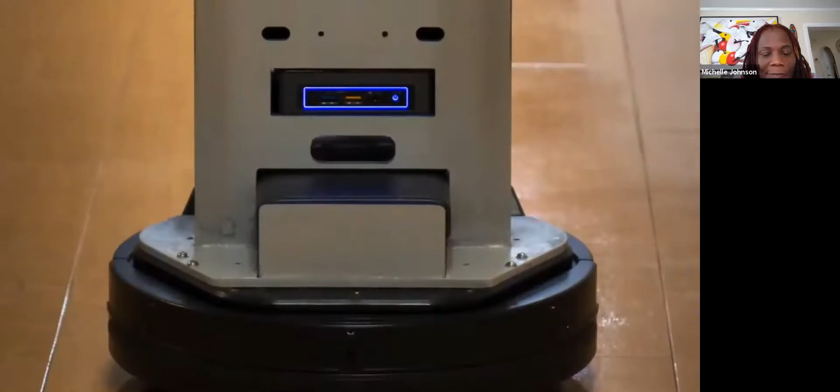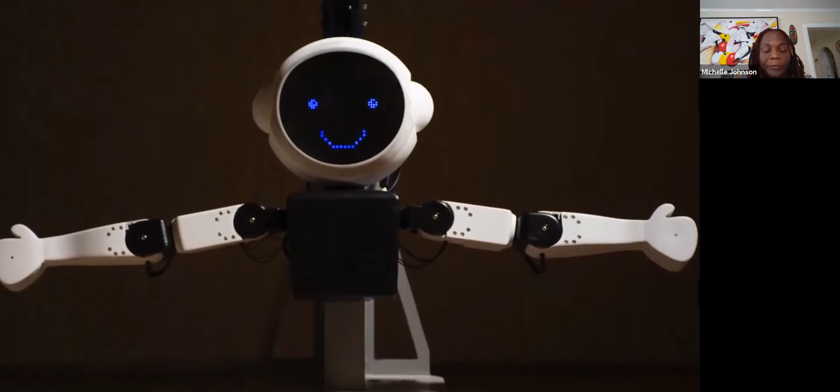Hi there. I am Lil'Flo, a remotely controlled robot for telerehabilitation, and this is my operator. I was designed to help with upper extremity motor assessment and rehabilitation over telepresence, and can play games with patients. The hope is that by playing with me, patients will be more compliant and engaged. The user interface to control me is very simple. My operator can type in words for me to speak, change my faces, put my arms in different poses, drive me around, and have me play games like Simon Says. My operator can see the patient through my 3 cameras. I have many different faces, and my arms can be put in any pose. My operator can remotely drive me in different directions. I can play motor assessment games like Simon Says with the patient. Simon Says clap your hands. Simon Says put your right hand straight out front. That was fun, let's play again next time.

Okay, cool. So that kind of gives an overview of what we're going to be talking about today: this system, the design of the system, why we've built it, etc. And the why is the beginning, and it starts with the people who are interested in being helped by this sort of system. That's people who generally have upper extremity motor disability.

Normally when we're looking at it, we're looking at people who've had some sort of neural trauma. The video you see playing right now is of patients who have cerebral palsy. It's the most common motor disorder in young children, affecting over 500,000 children in the US, about 2 to 3 per every 1,000 live births. It can range from people who have very mild disability and can play soccer, all the way to people who are wheelchair bound and can't move their mouth enough to eat. So there's a variety, and there's no cure for this.

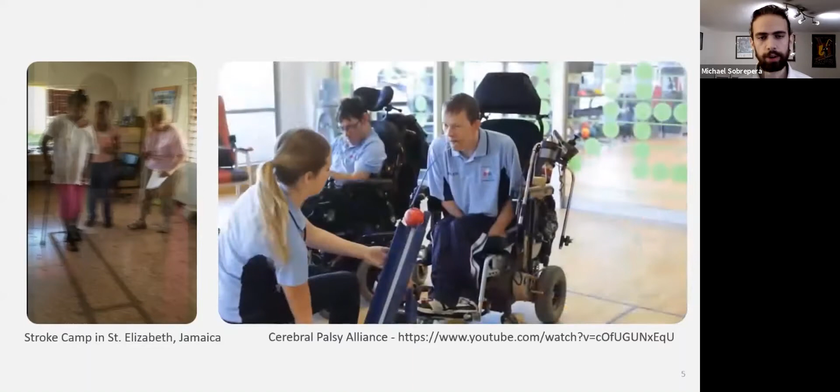The thing is, rehab can have a really profound impact on long-term outcomes, especially when people are young. You can see this little girl has spasticity in her left hand, where her hand is clenching involuntarily. Again, there's no cure for that, but if you can stretch her out while she's young, and if she can do various strengthening activities, then she can end up in a better place.

Now, in this other video, we have some people who have had stroke, and stroke is the result of a neural injury where part of the brain is denied access to oxygen. That can lead to motor and cognitive deficits. Again, there's no cure, but rehab can have a big impact. Rehab is one of these things where people have the potential to live a full life, and without the rehab, they won't. So it's really important that they get that rehab.

The thing is that there are a number of challenges to rehab today. These come from cost. Rehab is really expensive. The people who do the rehab are highly trained, and therefore they have a significant cost.

It also comes from the geographic location of where the people live who need rehab and where the rehab can be provided. A lot of people who have CP and stroke live out in rural areas or in low resource settings, so they can't get into cities like Philadelphia where you have significant availability of medical care.

We're also seeing large shifting demographics. Our population curves are inverting into this inverted pyramid where you have a lot of old people and not as many young people. That means the few young people you have aren't sufficient to take care of the elderly, who are more and more surviving things like stroke, as well as the young people who are more and more surviving things like cerebral palsy at birth. That really leads to supply side challenges where you just don't have enough rehabilitation professionals to take care of the load of demand.

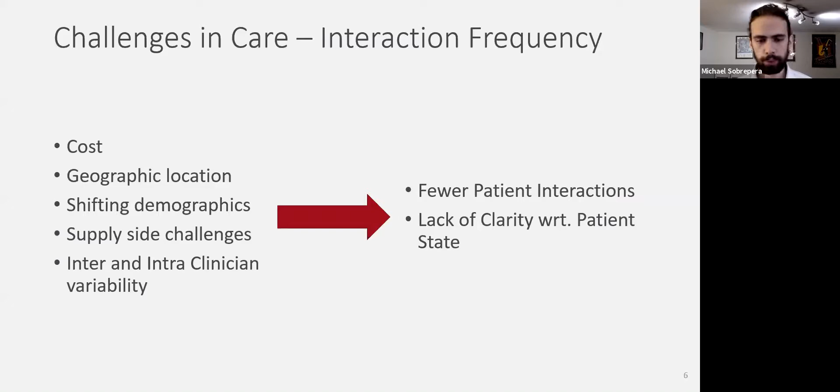So there are a few goals that come out of this. The first is to develop and evaluate a robotic system, which you've now seen. We've developed it, which uses a social robot to enhance telehealth interactions.

Why would we want to do this? The premise is that if you have these distant interactions that can't happen right now naturally, and now with COVID even more so, everybody says well, we can use Skype, FaceTime, some sort of telepresence-based technology. But for something like rehab, we don't think that's necessarily good enough. We think you need a more present type of interaction that's easier to understand, especially when you consider that a lot of these people also have some sort of cognitive deficit. Understanding over a screen can be limited.

This comes up frequently. I discuss this robot with a lot of kids. They come in for these outreach sessions, and I'll always ask them the same question: if your mom was standing right next to you and told you to take out the trash, or if your mom called you on FaceTime and told you to take out the trash, which one are you going to listen to? All the kids know they're going to listen to their mom standing right next to them, but maybe not digitally.

And so it's the same thing here. How do we make these interactions more real? How do we make it so that when I tell you right now to lift your right arm out to the side, and that was all you just saw, we need to improve that. I could stand back, lift my arm out to the side, now you can see it, but now you can't see my face, and there's a lot lost there.

We also want to develop a computer vision-based objective diagnostic tool for upper extremity function to address some of those clarity issues. If you have people working over telepresence, we think you need more than just the video coming back to the clinician, so we'll get into that a little bit.

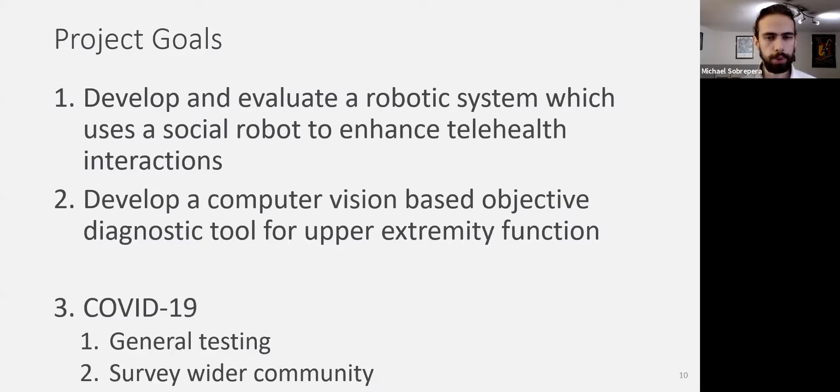More recently, we've had some project goals develop around COVID-19. The robot has been used a few times in the hospital, and there have been some clinicians who've tested it pretty heavily. We'll get into a little bit of what we've been doing with that, and some surveys we're doing in the wider community to understand how robots fit in this new post-COVID telepresence imbued world.

I want to keep diving into why some of this stuff would be a good idea. This is our theory of how these interactions develop. Normally, when you're in person, you have instruction and emotion flowing back and forth. The clinician is able to motivate the patient to do rehab, which is oftentimes not comfortable and not that fun. The clinician being present with the patient allows them to perceive the way the patient's moving so they can deliver some sort of long-term assessments.

But when you just have video, you're going to have instruction passing back and forth. I can tell you what to do over video, and I'll be getting some noisy state data back, but it's not as rich. So we put this humanoid robot onto the telepresence platform that you've already seen.

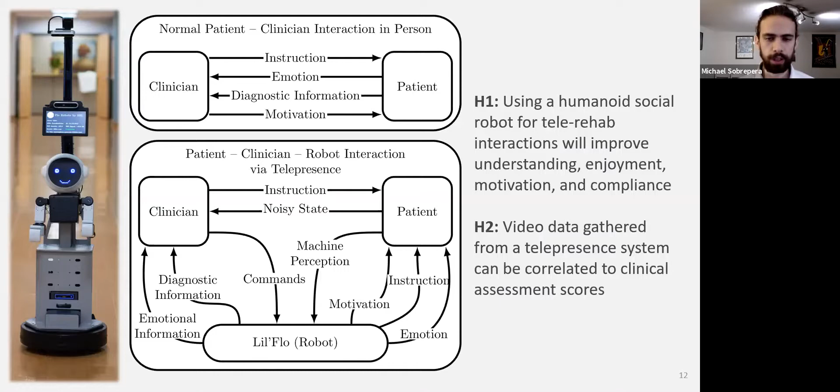Our goal is to fill in all that richness of the interaction. Our first hypothesis is that using this humanoid social robot will improve understanding, enjoyment, motivation, and compliance. And then that we can use video from this system to deliver some of these assessments that the clinician needs to be getting back. This isn't something that's coming out of left field.

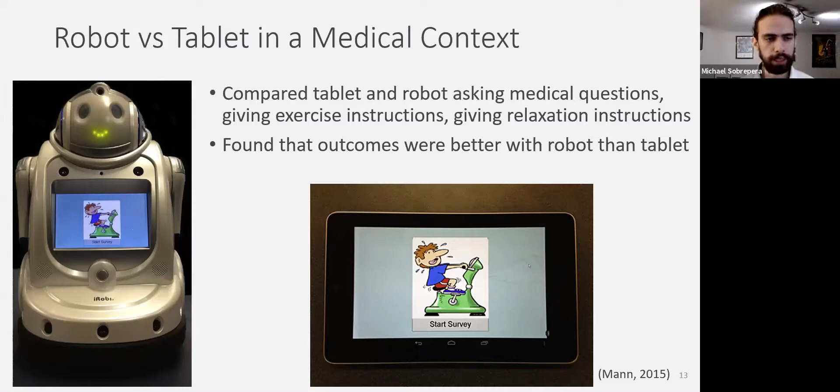There's literature that supports that this is a good idea. This study with Mann in 2015 used a very simple robot that's really just a screen on a robotic avatar, as well as a tablet, to administer surveys and workout instructions to a series of participants. They found that with the robot, people were more interested in doing the activities, and they were more honest with the activities they were reporting. So again, the presence of that robot, even as simple as it is, seems to have a positive impact.

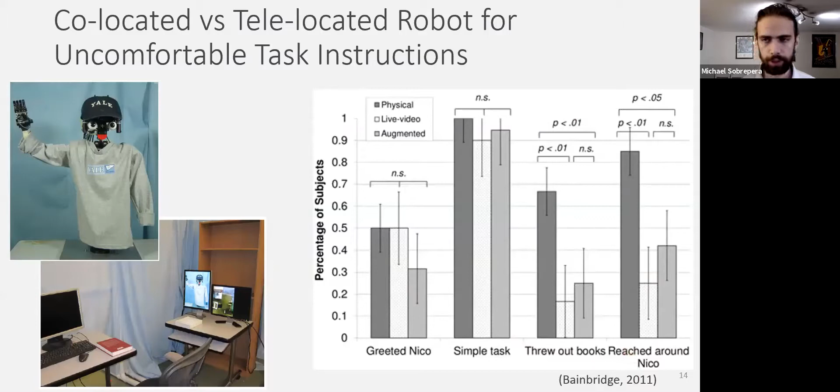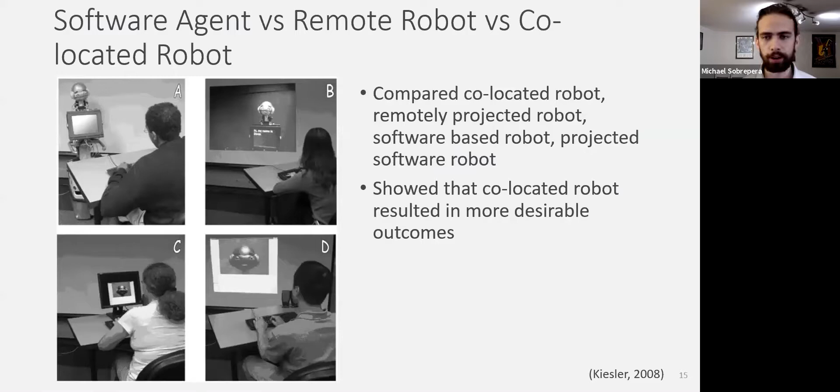People have looked at various different ways that these projections could be done to see if the projection is important - different sizes and scales, just the face, the whole body. The results are consistently the same: having the robot present leads to better outcomes as far as compliance, interest, and enjoyment.

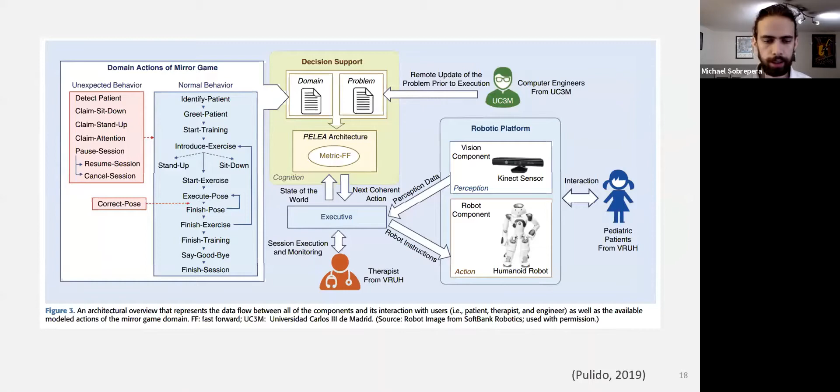In order to do all this, they have a large software stack under the hood with some relatively rigorous math, trying to understand the state of the robot and the patient and the entire space that they're in to enable them to do these sorts of interactions.

This robot was tested in a number of situations with some providers to try to understand what sort of designs those providers might need. Those were rehab professionals in inpatient and outpatient rehab hospitals, as well as a senior daycare where patients come in for the day but then live at home primarily.

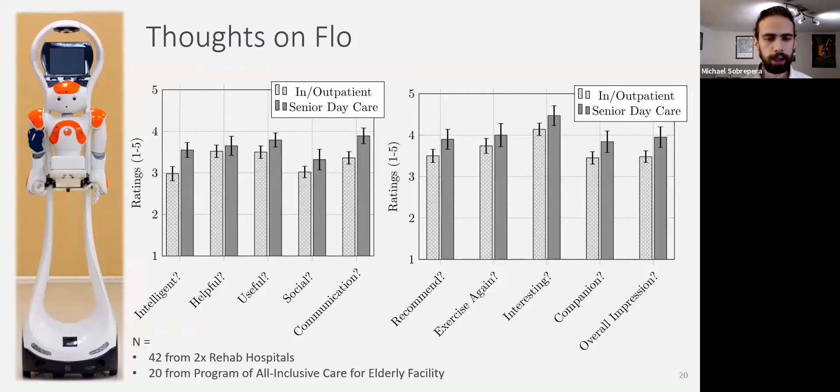The interaction they did was they were shown what the robot was capable of, and then they did an activity with the robot. So they would want to exercise, do that exercise again, whether they could see it as a companion in their overall impressions. Again, this is generally, we see as positive results.

But the really interesting thing that came out of that, and drove a lot of the future development of the robot, was asking them what they needed in the design. There are things you'd probably expect, but it's always good to make sure you're right when you expect these things—so things like needing portability and ease of setup. This first system was not portable; it was incredibly heavy.

Lifting it was effort. It's not easy to set up. It's two totally separate systems that don't integrate. We needed to change that and really get to a single push-button setup, as opposed to pressing 3 buttons and turning on 2 computers and all that sort of stuff. That's not realistic.

The cost is really important as well, and this first system was incredibly expensive. The Nao is an awesome platform, but it's over-engineered in every way, and as a result it's overpriced for applications like this. The Telepresence system was also very expensive given the kind of compute power it had on board.

It's a good system, it lasts a long time, but its screen is small, its cameras aren't very good, and there's no way to really get into it to modify it.

Maintainability is important, and I think the prior system was pretty good for maintainability—you could wipe it down and things like that. The Nao robot, or at least the Telepresence system, was good for maintainability. The Nao robot had problems both with maintainability and durability.

Anybody who's used Nao knows the motors like to overheat, and when something breaks inside it's a serious effort to fix it. So we wanted something that would close the gap on maintainability and durability so it could be maintained in the field, if it was ever deployed.

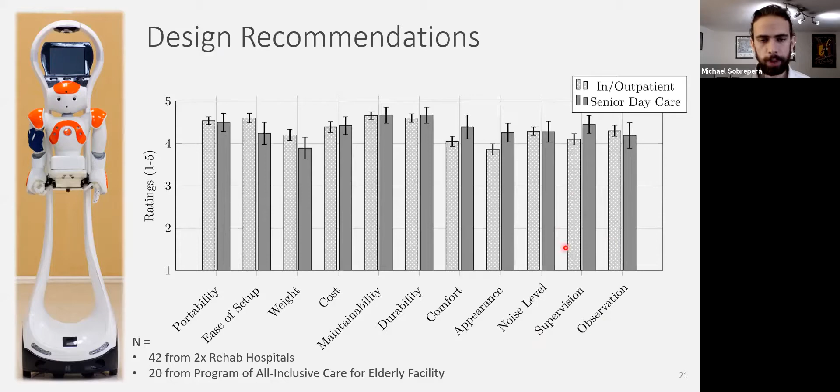People also mentioned they'd like it to be used for supervision and observation. You see it's a little bit different depending on where the people are, and that's kind of what we would expect.

We also asked them for some open-ended needs. What you take away is that the needs of a senior daycare and an inpatient-outpatient hospital are different—they treat different types of patients with different objectives, and as a result their needs diverge. You need to be cognizant of that when designing, whether you're designing for both or one or the other, and how that interplay will work.

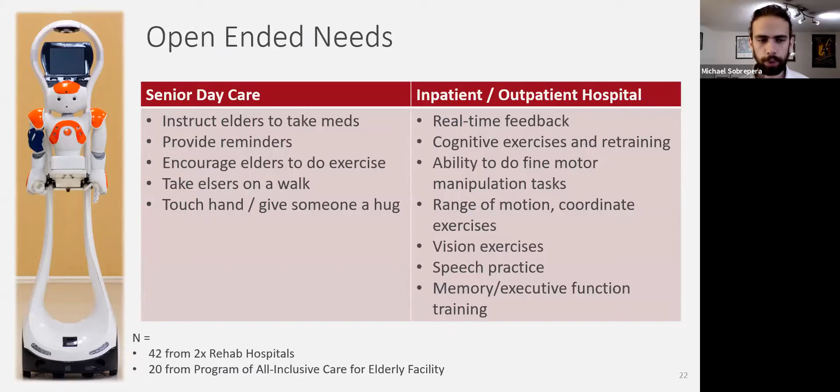With all that in mind, we began to design a new custom system to be fully integrated. At the beginning of my PhD, I started with something really simple, throwing together prototypes with a Create base for my robot, and this Bolide robot from XYZ Robotics—essentially a series of motors with a microcontroller similar to a Dynamixel, then putting a camera on top.

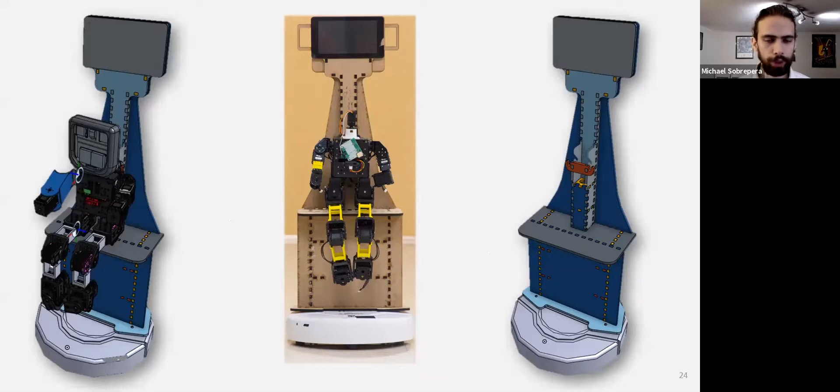We quickly realized that we needed a little bit of help from some designers, so we brought in a well-known robotics designer, Carla Diana, to help us begin to create a form that would convey what we wanted to convey.

We did that intentionally—we wanted to make sure the robot wasn't biasing interactions based on how it looked toward one group or another. Because it has a kind of spaceman look, it doesn't look like any particular person, but it still has a humanoid form that's easy to understand. Because of that, we hope a large group of people will be able to interact with it, have some shared empathy with it, and drive positive interactions.

The head on the robot is what we consider to be the source of the social interaction. That social interaction is important because it's how you motivate people to do these activities, enjoy them, and want to do them again.

Carla helped us develop a bunch of themes for heads, and then we started prototyping them. Here's, I think, the first 3D printed prototype we did of the head. We were looking really just for form and scale, not really mechanical soundness, and you can tell the form and scale aren't right.

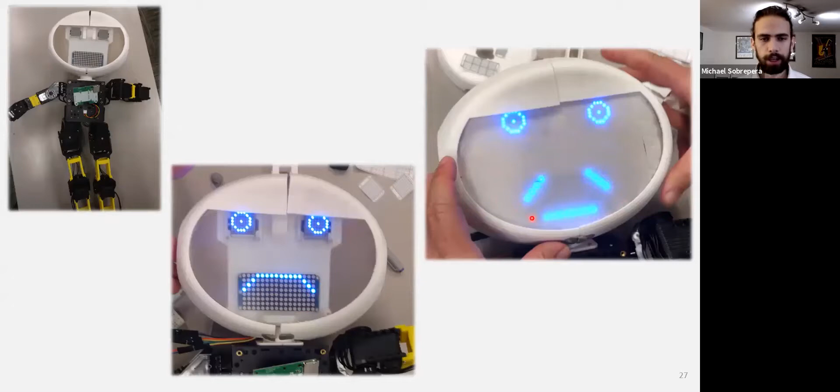The head is clearly way too wide for this body. The eye and face positioning is not right. We immediately realized, within 30 seconds, that being able to see these screens was awful, so we put some paper or tape over it to try to diffuse that a little bit. But these sorts of iterations are what you go through to begin to develop something.

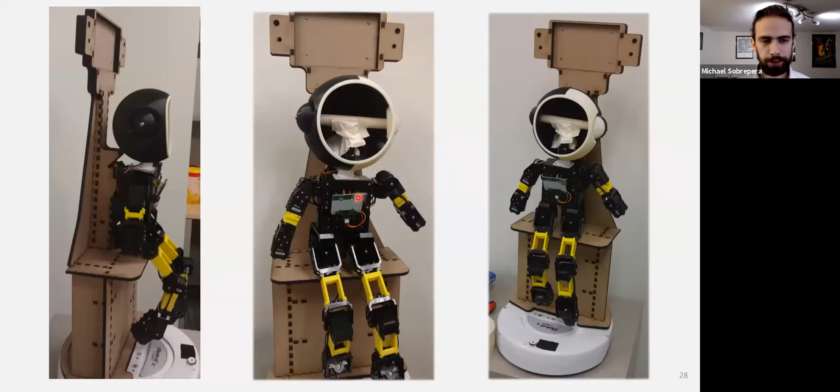And we continued iterating, and we ended up with a form that looked like this. You can see that the mechanics still aren't quite right. We're not sure how we're mounting any of this, but at least we were happy with the form.

And this is the final iteration of the head and face. You can see that one of the things we've done is really hide the seams of the head. So right here, there's a seam that runs along the forehead and then goes back behind the ear and down. There are smooth curves.

There are ears. We looked at versions with and without ears and did straw polls in the hospital to see how people were reacting to that, how other researchers were reacting to it. And we found that the ears conveyed a greater sense of comfort and made people believe that the robot could hear them, which is positive for social interactions.

But then the question is, how do you put a screen onto this thing? We didn't want a screen that was bolted on and glued on, with messy seams. So what we actually do is mold it in. We take the 3D printed part, make a negative of it in silicone, and then mold in a clear urethane that we add a dye to.

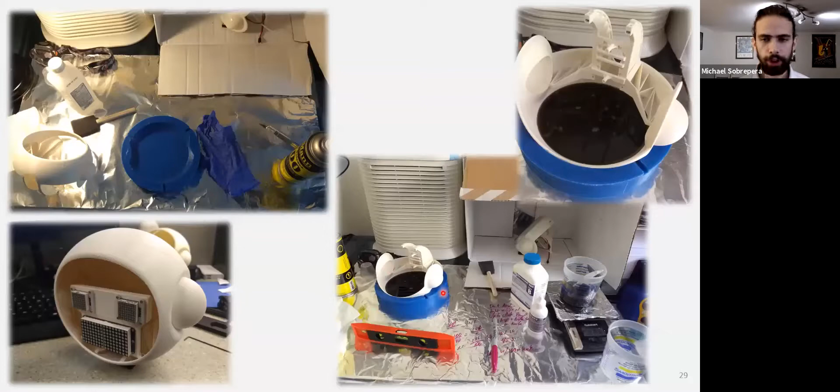And we did a small study to test what these emotions were actually saying, because we had an idea, we had named them, but we wanted to see what other people would think. So we just took the head of the robot, mounted it on top of a box covered by some black sheeting, recorded video, and asked people how they felt about it.

There were two phases to the study. The first one, they just sat there observing the robot and answering some questions about it. There were two modes for that: the robot could either be dynamically changing its face, looking around so the eyes can look different directions, or it would just be static on its default neutral face.

Halfway through that first section, those modes would switch. So people who saw it statically initially would then see it dynamically, and people who saw it dynamically initially would see it statically. The questions we were asking them were mirrored across those two, different wording but the same general theory, and then we randomly ordered that, of course.

Then in the second part of the study, we asked people to name the word. We showed the subjects every face that the robot had in a random order and asked them to tell us the first word that came to their mind for each of those.

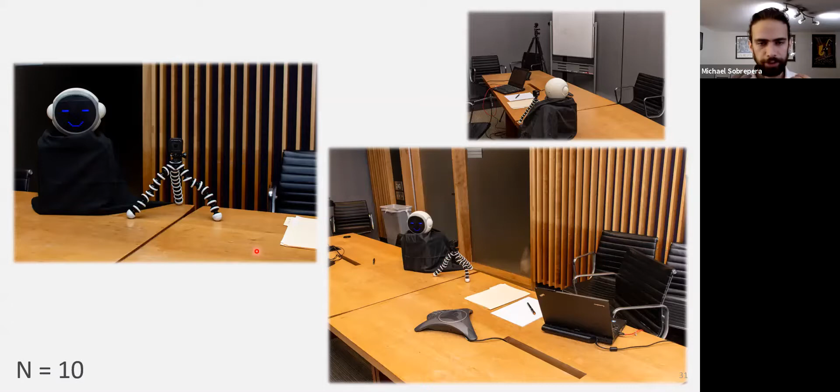So the first part of that study didn't tell us a whole lot. That's not terribly surprising, we only had 10 subjects. People were generally friendly and comfortable, or generally found the robot to be friendly and were comfortable around it. They didn't find it to be as trustworthy, which is somewhat reasonable since its body was hidden. We got a lot of open-ended responses about how you can trust something when you don't know what it's doing. People did find it machine-like, and that's not a negative to me because we don't want it to be a person.

That falls into the uncanny valley. We want it to be clearly a robot that you can then develop a connection with. And we looked at different ways of interpreting this data, and it didn't really matter how you sliced it, you didn't get much significance out of it, and that's okay.

Even these small little studies, you can say well, obviously our interpretation was wrong. N of 10 is much better than N of 2 on the designer side. And so these are great learnings.

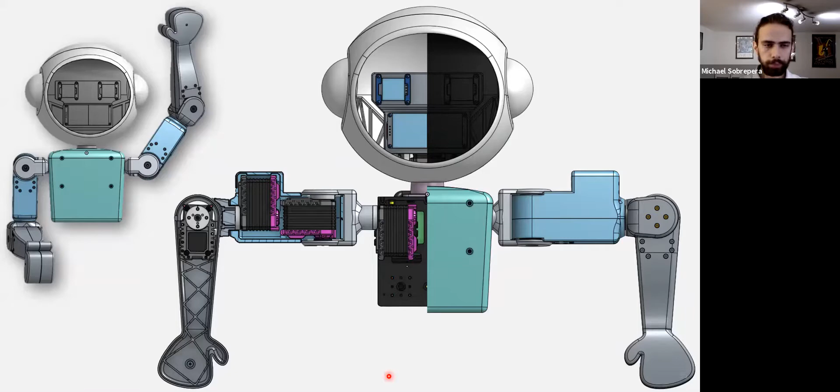That means the arms need to be able to move around, and through somewhat of a human range of motion. That's not trivial to do on a small robotic platform like this. We use these pre-built motors because it significantly lowers the cost to design, makes it easier to maintain, and easier to program.

So the question was, how do you fit these sort of boxy motors into these arms? Finding an arrangement that worked well was a little bit challenging, but then also finding forms that were pleasing to look at was a challenge.

Danielle Chen was another designer who came and worked as a mentee of mine over a summer. She iterated a lot on these forms and came up with the idea of having these sorts of mittens, getting some of the tapers into the body, into the wrists and that sort of thing. Then I was able to take her design work and turn it into an actual mechanical design, shrinking everything, making it all strong and fit together.

There are some important things to note here. One is that on this arm, the shell of the arm is actually the exoskeleton—there's no internal structural support for the system because there's just not enough space. The other benefit of doing it this way is that you've minimized the amount of screws.

So if you need to maintain it, if one of these motors manages to burn up for whatever reason, you're able to pop open the arm. There's not a bunch of structure in there—it's just all screwing straight onto the motors, with one screw down here at the hands.

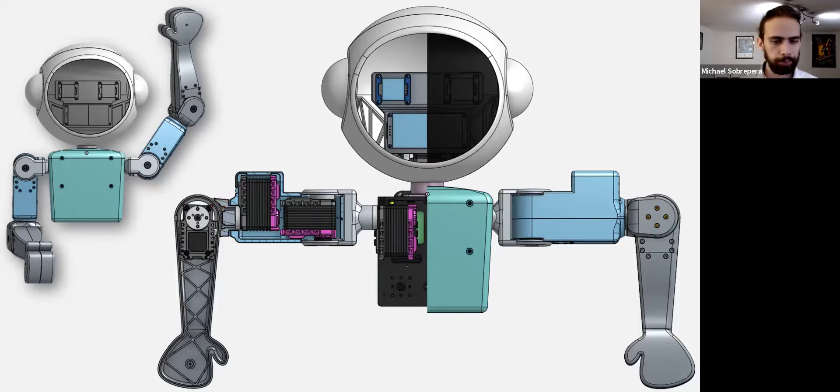Another challenge is getting wires around these sorts of things. So we use external wire routes that are hidden as best they can be behind the elbow and the shoulders and things like that. But that's kind of the best you can do affordably while keeping things small, where slip rings wouldn't really work.

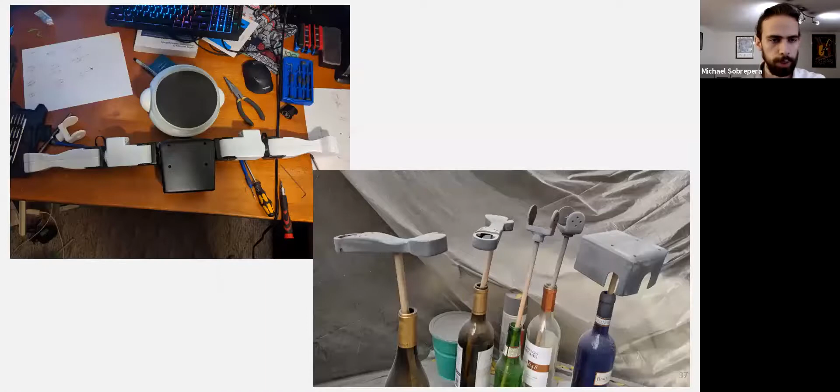One thing you should notice here is that these prints are messy. A lot of times, when people develop these robots, this is close to the final form they take—they leave it in its printed form, maybe sand it a little bit. But it was important to me that we build a system that looked production grade, even if it's not being built with production grade technique, so that we're testing against the ideas of making a system production grade. So we spent a ton of time post-processing all this, building what is, I think, actually a pretty beautiful robot.

There are some explicit design choices being made here with the colors of the system. The torso is black, and then you have these alternating joints that are black, and arms that are white. That's to drive contrast in the system, so that people with visual impairments or cognitive impairments, etc., can see this robot and understand where things are going. Having a constant color scheme wouldn't do that as well. This high contrast black and white really maximizes the amount to which people can see that.

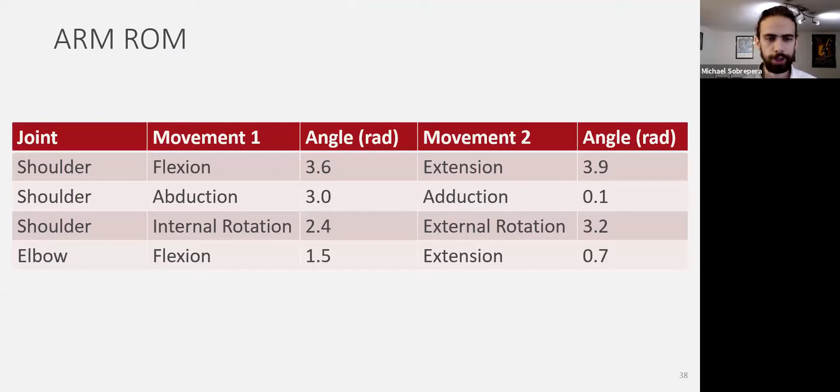I mentioned that being able to move through human range of motion is important, and so here are the range of motion measurements. They don't mean much on this table, but this means more—you can actually see some of the motions the robot can do. You've already seen it wave, you've seen it clap, and you can put its arms out to the side.

Some kids at an outreach event asked me if I could program it to dab, and indeed you can program it to dab, which made them very excited. That actually gets responses in the hospital as well—people love that. But you can also see a limitation here: this is as far as the arm can curl itself in, and that's not realistic compared to humans. At 90 degrees, we can go almost to 0. That does limit some of the activities you can do, but it's a reality of designing these sorts of systems—there will be limitations.

The other big limit is that we ended up going with these mitten type hands. That simplifies the design and allows low weight at the end of the hand, so the motors can be cheap. But it does mean that the large space of fine motor tasks is really impossible to truly do with this robot, and fine motor tasks are really important for people in our population. So you can still do things like telling the robot to button your shirt, and it could tap on its chest as it pretends to button its shirt, but there is a limitation there.

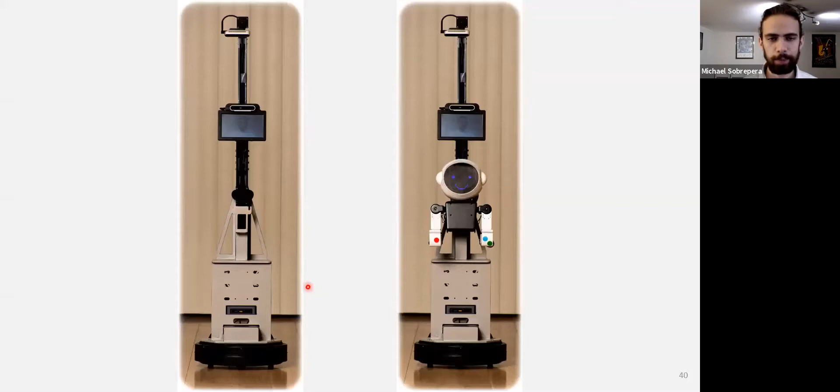In fact, now, after having tested it in the hospital recently for COVID, we've moved away from this speaker. We now have 2 much bigger speakers that are hidden behind the robot, because it turns out that people can't hear as well in hospitals. We should have thought of that, but that's why you test.

So I mentioned there are these cameras on here, and earlier on I mentioned wanting to do these perception pipelines, and so these go together. The idea of the cameras is to be able to watch people who are doing interactions with the robot, measure how they're doing those interactions, and tell the clinician what they're doing. The second goal of the cameras is to allow the remote clinician to be able to actively understand what's going on in the situation and be able to manage the robot in real time.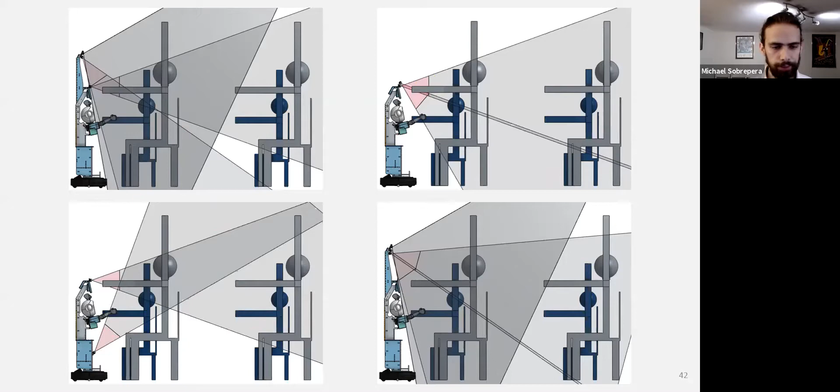Okay, so this is what that ends up looking like. You can see my upper body when we're doing a remote activity, things like a Simon Says type activity. And then you can also see my hands touching the robot when we're doing a target touch activity. This is useful because one of the big indicators of function is doing point-to-point motions. They're relatively easy to analyze, and there's a lot of literature on how point-to-point motions should look like. So when someone moves your hand from one place to another, this really simulates that. The Simon Says is really interesting because you get these more macroscopic motions.

They're not as well understood, but you also get range of motion, which is very well understood, easy to extract, and has direct clinical meaning to every clinician. If you tell them that here's the range of motion on this shoulder, they know exactly what that means, and that's really powerful.

I'll note that we tried an earlier version of these cameras where one of the cameras was really low. That was another awkward moment where we realized that having cameras low on a robot is not good for social interactions. People realize there's a camera down there, and nobody wants to be seeing it or be seen by it. So thinking about how you place these cameras is really important, and maintaining privacy even when people can see the robot.

And so then we tied this all into this web-based interface. The interface is designed to be easy to use, but also give a clinician all the control they would need. You can see the views from the different cameras, as well as the view of yourself. You can also see a rendering of the robot, so you know where its arms are, because seeing it, you can't always see the arms here.

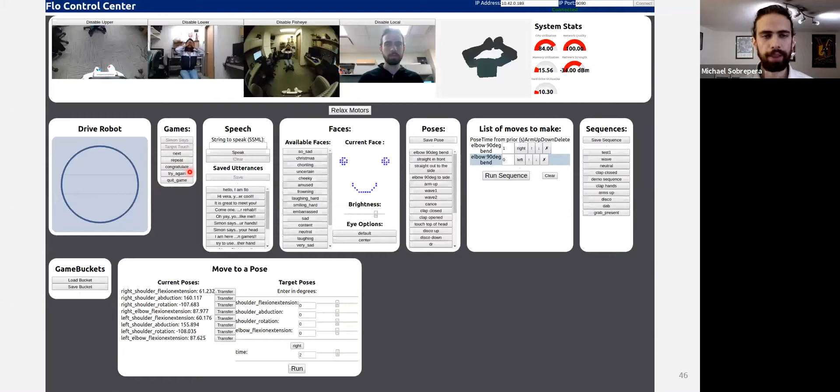Under the hood, I don't want to get too much into the software other than to say it's a ton of software. The programming effort to integrate a system of this complexity, without even having autonomy built in, is absolutely huge. So we use ROS to do that. But there are a bunch of different modules we've had to build into that, modifications we had to make to other people's modules. We use AWS for text-to-speech.

With moving towards COVID, it became apparent that we would want to do things beyond just testing in our lab, or me bringing the robot somewhere and testing in like a short distance. Whereas all this was originally being done on a single Wi-Fi network, as people generally do with robots, earlier this year it became apparent that I should scale that out. So I did. We have a pair of servers that run over in New Jersey in a server farm, and this manages all these communications going back and forth.

This is complicated. It's been really, really interesting to learn this entire web stack and learn how you deploy systems into the cloud that can do all these sorts of communications, how you tie together multiple databases with multiple microservice servers and all that sort of stuff, and then how you make video go over the internet.

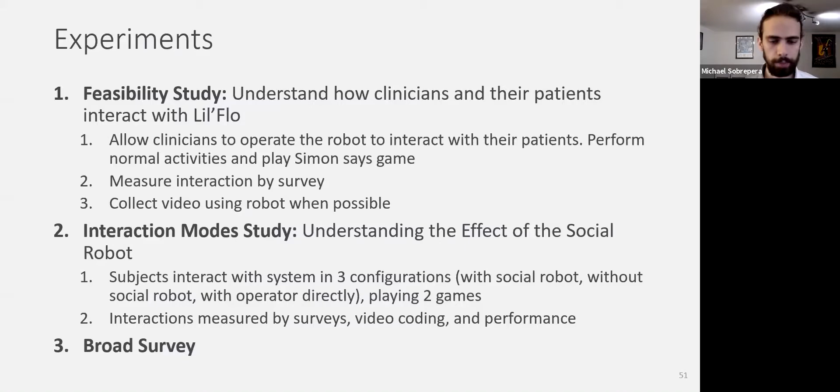Here's where we're planning on doing those studies. We can skip over that.

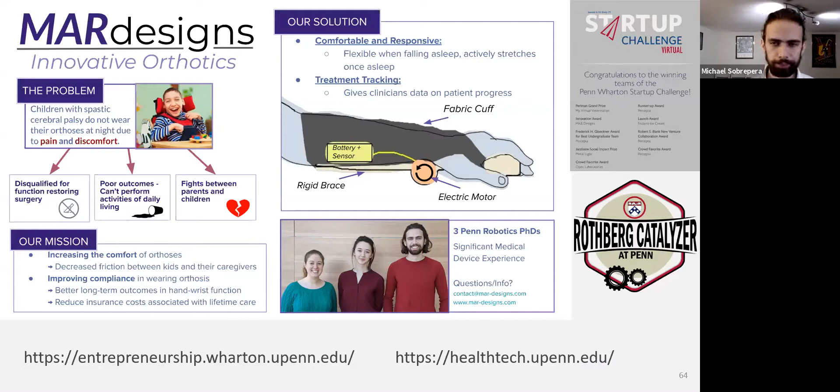I've also done a ton of outreach, and I think outreach is really important. I think it actually falls into the ethics discussion a little bit. We shouldn't be developing these systems in isolation. We should be developing them with the community knowing what we're doing, talking about it, and getting the education broadly, at least the interest, to be able to think about joining us in developing them as researchers, engineers, or even business people, whatever it may be.

Doing things like the Research Experience for Teachers program, going to schools, doing outreach events here, I think those are really important. A lot of times it's the same group of people doing these outreach events, and I really want to encourage more of y'all to come join us in these, because they are really impactful and one of the most fun things you can do. They take a lot of time, but they're really awesome.

I also have a note on pacing for the minute we have left, for the younger students. What you've seen here all falls within the scope of my qualifying exam. I'm starting my 5th year and I still haven't finished my qualifier. I actually reread my qualifier proposal yesterday, and it's kind of laughable — I can't believe it got past whatever review it went through.

But when you're starting to work on these things, you have these broad ideas, and then you go deep and realize how much harder they are, and it keeps getting harder and harder, and that's okay. Nobody told me until the end of my 2nd semester that it was okay they hadn't finished their qualifier either. So if you start asking older students, they're all gonna tell you they haven't finished their qualifier, and that's all right.

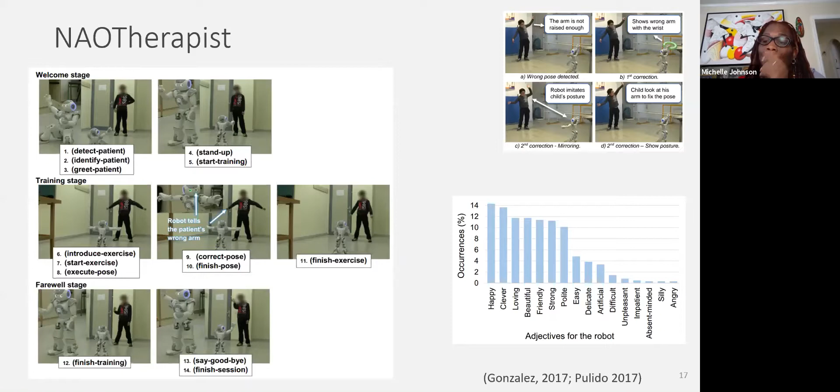There's one right here in the chest to drive your arm rotating up and down, and then there's one right here that controls your arm going like this. Then there's one right here that controls your elbow rotation, and one that controls your ability to curl your arm up. So that's 1, 2, 3, 4 - so 8 total, I think that's right. I should know that off the top of my head, but I don't.

For controlling them all, they're actually all controlled by a microcontroller that sits inside the chest, and that microcontroller connects via USB to the central computer, so they're all controlled over serial. I should specify that the microcontroller connects to the motors - these motors are like Dynamixels for those who are familiar. It's not a current or stepped signal going to the motor; the motor actually receives a serial signal and has its own controller internally.

Okay, you have a question about the decision to have a 3-agent system, the clinician, Flo, and patient, instead of merging Flo and the clinician as one entity. Or could Flo behave as a peer to the patient, perhaps for children, who's also participating in the rehab activity to motivate the child? So talk about the rationale behind that.

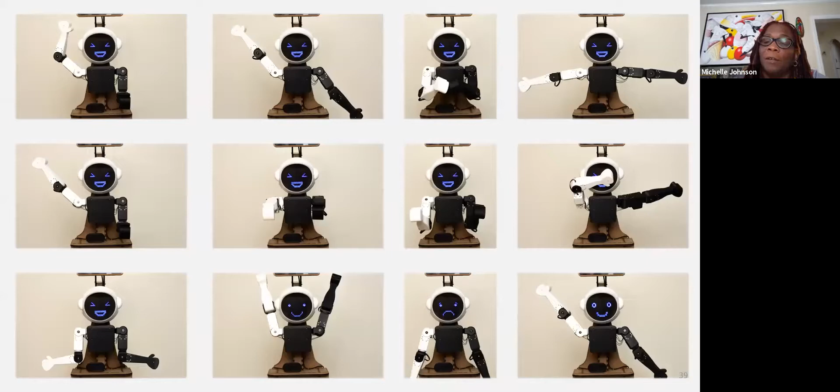Yeah, that's a good point. So one of the things asked was about the design of the face. Ming Wang asked, is it possible to make the whole face a digital screen to better express more information?

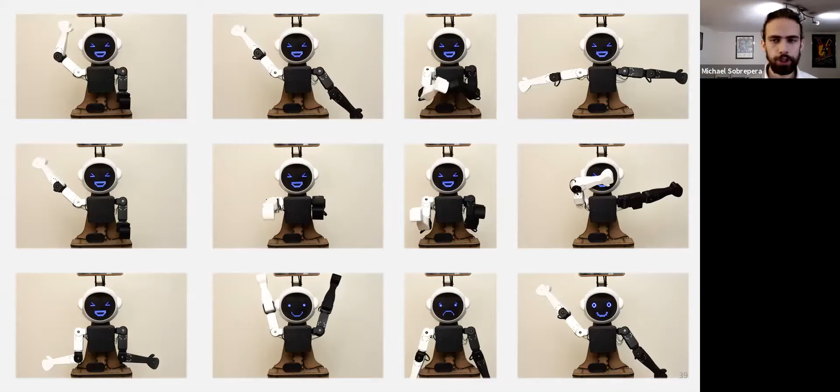Yeah, so we actually tried that in one of our earlier prototypes. We had a few different LCD screens that we slapped in there. It can be done—if you want a great example, Moxie from Embodied has done that really, really well. For us, the challenge was fitting the LCD screen in there. The amount of bezel on the screens we can buy at our scale isn't ideal, and even more importantly, the brightness of the screens is so low you have to make the screen visible. You end up with this jarring thing where the screen is visible with something darker around it. It just doesn't create the fully integrated experience we want.

The other challenge with a full screen is that now you have this huge design space to work with. Here there's a limit to how many faces and combinations of eyes and faces we can make, but with a digital screen you've really opened it up to do a lot more. And you need a design team able to handle that.

So a follow-up question on the whole uncanny valley and your decision to try to avoid that.

William asked, how have you gauged how people react to the different features of the robot?

I think the idea is individually, right? So the face versus arms. I don't know that we've been able to break it apart to that level. We did have a study with just the head and face, and I don't think it was in the uncanny valley, but it might have been uncanny to have a robot head mounted on a box with a sheet over it. Some people talked about not liking being unable to see the rest of the body. So parts of robots on their own, I don't think fall into the uncanny valley, but they fall into some other uncanniness that's potentially disturbing to certain people.

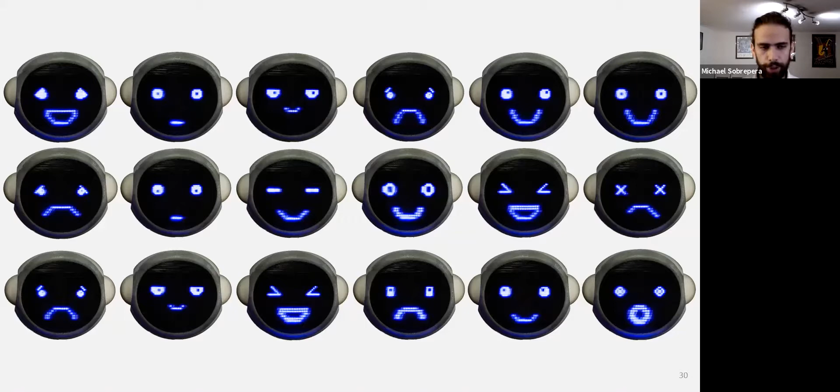We've met with multiple infectious disease people - they've examined the robot, they've studied it. There are things we had to modify on the robot. When we take the robot around, somebody's got to wipe it off with hydrogen peroxide wipes each and every time it comes out of the room, and that's a challenge. We closed the back of this so nothing can get in there, so that's wipe-downable now as well.

So yeah, there are definitely challenges to that. The goal of what they would really like is to have a system that's docked on the floor, with a fully integrated power system, that they can log into whenever they need to and drive it around. Dr. Johnson and I were, a couple weeks ago, at this summit of roboticists discussing infectious diseases and robotics.

I brought up the point that these robots can't even open doors - nobody's robot can really open doors. So there are significant challenges to deploying this. Can you actually put it into a restricted floor where there are doors all over the place to protect people? Not really. So we're at the early stages of testing, driving feasibility, and trying to build more interest in this sort of thing.

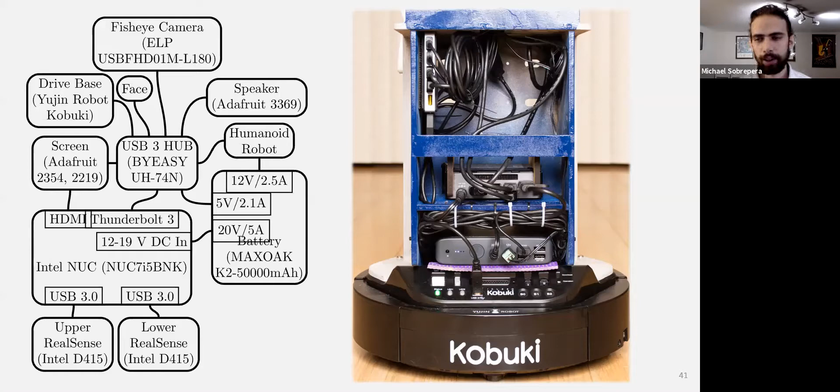And I think that interest is coming fast. A year and a half ago, when I would discuss telepresence robots with people, a few would be excited, but a lot were just kind of like, meh, whatever, we like the way we do things now. And now everybody's excited.

You have one last question from Pratik: you asked about the haptic feedback interface - how apt will it be, especially for blind and or deaf patients? If we were working on that, what would you have to do there? And then we need to wrap up. Okay, last question, that's interesting - I'll be honest, I haven't thought about it in that direction.

There are people in the lab who've built on-joint sensors, but never haptic systems. I think the way you'd think about building these entire interactions would be vastly different for somebody who was especially totally blind. For somebody who's deaf, I think a system like this has a huge argument, because right now telepresence for somebody who's deaf isn't good. But if you have a robot that's moving around, at least they can understand that, and you've got a screen you can put captions on - so the screen can be used for more than just showing the clinician.